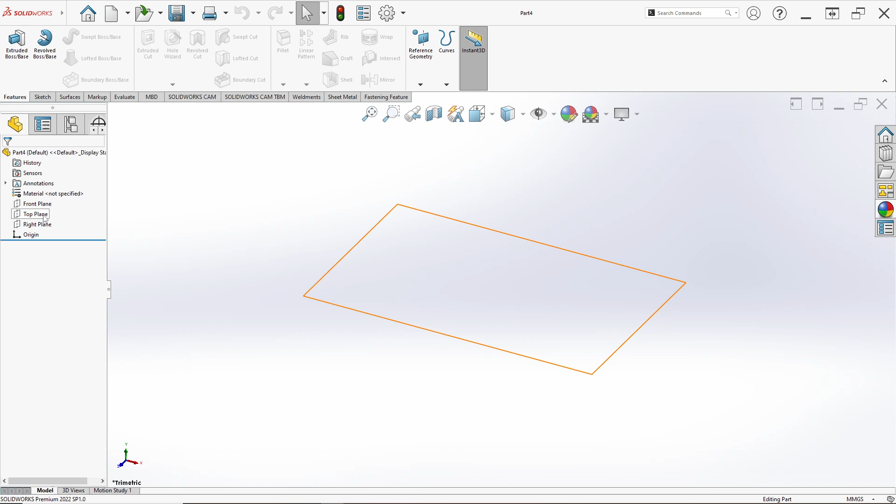At first we start by drawing from the top plane. Right click on the top plane and click sketch. Draw a circle from this point, then set the dimension of the circle. For example, the diameter is 120 millimeters.

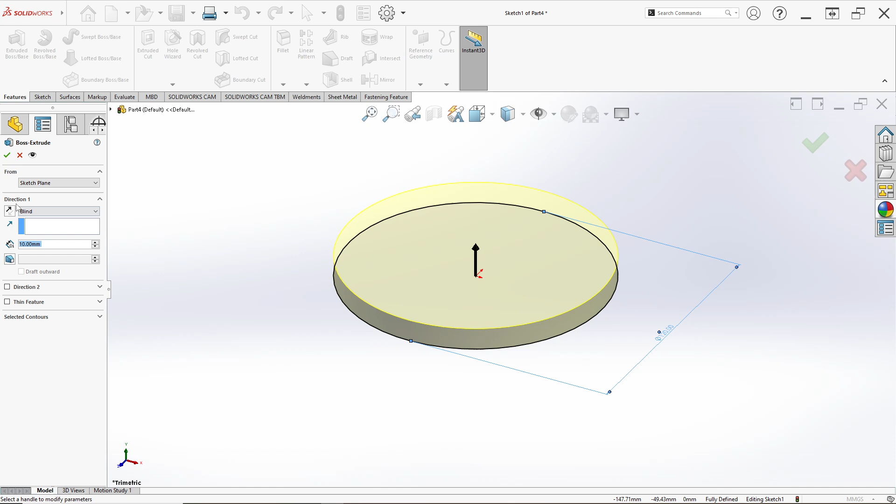After that, export to solid part with feature and click extrude boss. Direction is blind, and for depth, for example I set it to 135 millimeters. Click OK, and now we have a solid cylinder like this. We go to feature and select shell.

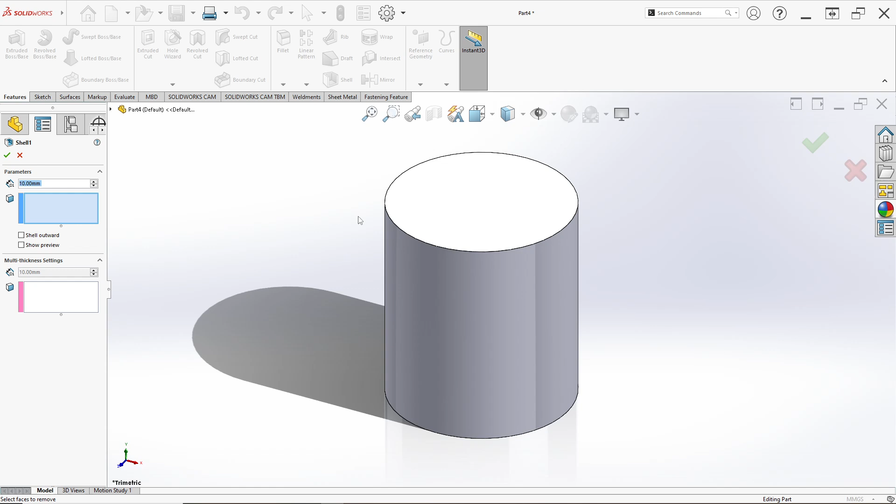We use the shell feature. The shell feature is used to hollow out a solid body by removing material from its interior, leaving a thin wall of uniform thickness. For face, we select the top face in here.

For thickness, I set 1 millimeter, for example, and click show preview. The thickness of 1 millimeter is the thickness of the wall. After that, click OK and done. It's so simple, removing material from the interior and leaving a thin wall of uniform thickness like this.

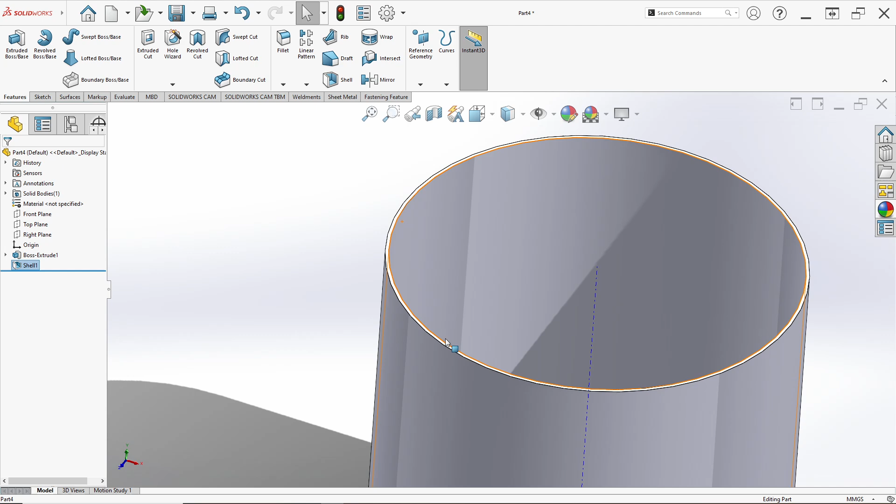Then select the front plane, right click and click sketch. Draw a center line from this point to the top like this. Ensure the center line is set to make vertical.

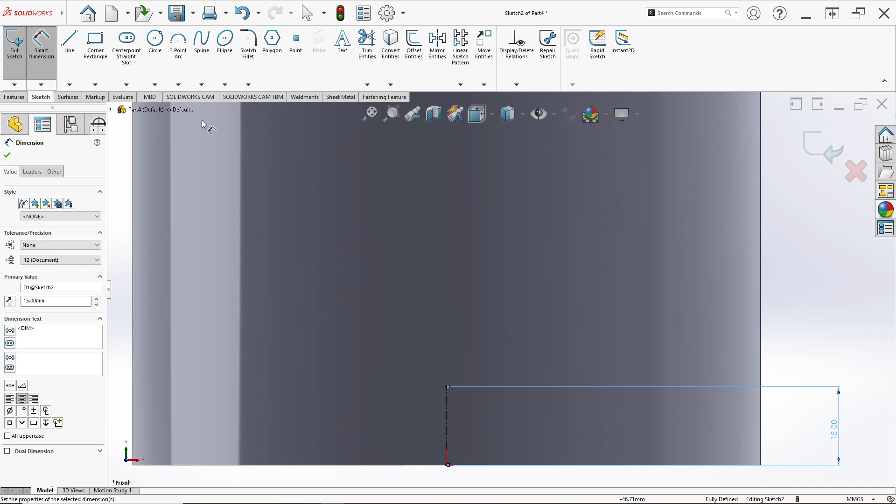Then set the height of the center line, for example 15 millimeters for distance. Then select polygon from the sketch and draw it like this. Set the dimension for the inner circle of the polygon, I set 15 millimeters too.

Click exit sketch. After making the sketch polygon from the front plane, go to feature again and click wrap. We use the wrap feature here.

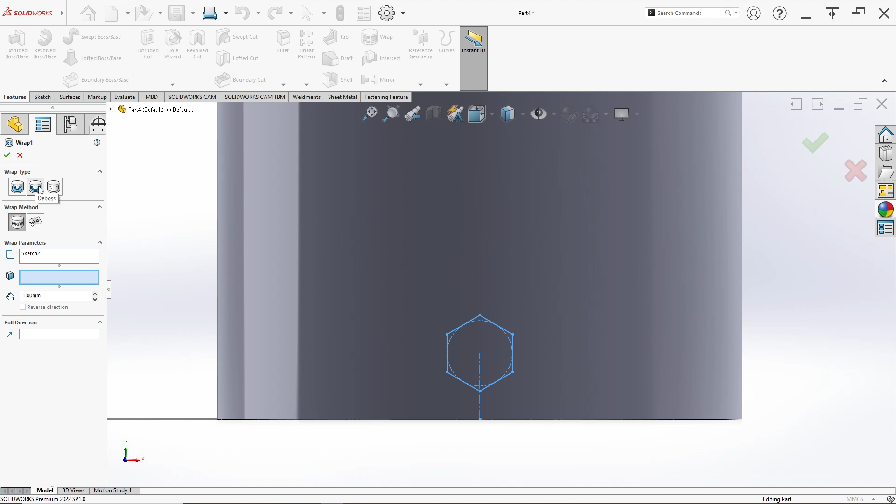The wrap feature is very useful for engraving, embossing, or creating cutouts on a curved surface. For wrap type, I select deboss, because deboss is used to engrave while following the curvature with no distortion. For face, select this face or cylinder face, and click OK and done.

It's so simple. We just engrave while following the curvature, the polygon engraved from the wall of the cylinder like this.

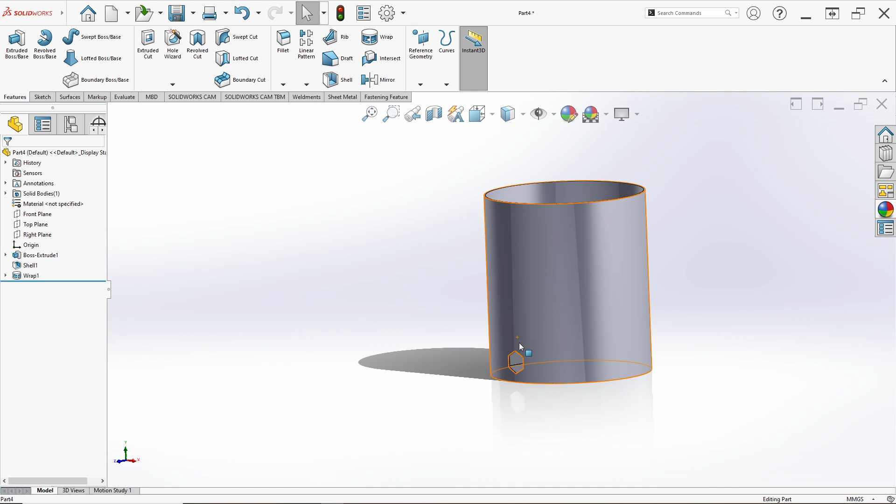Then go to the front plane. After that, go to feature and select circular pattern. For feature and face, select this wrap one. For direction, we can select this face again, the cylinder face.

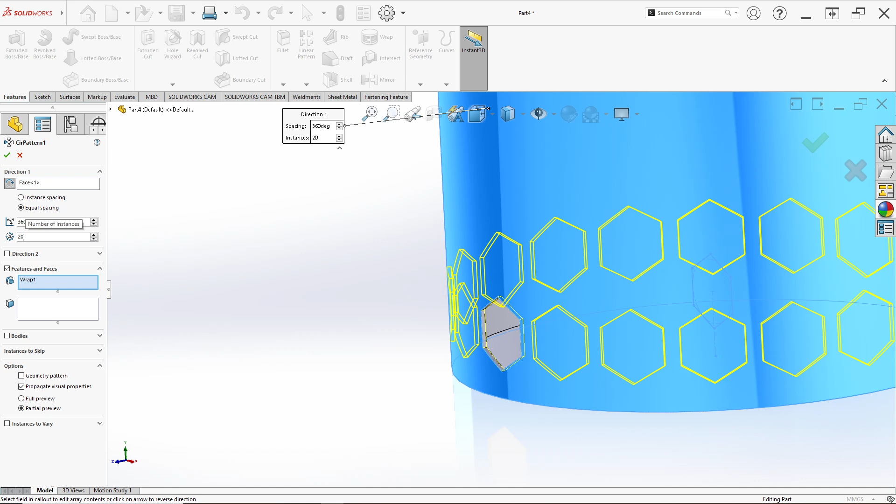Click OK. We can see again in edit feature, for example I set 20 for number of instances. Click OK, like this.

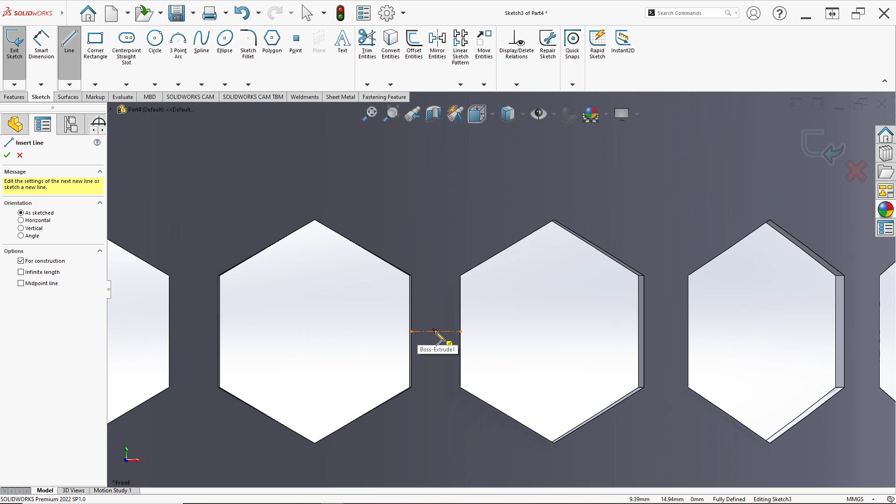Then go to the front plane again, right click and click sketch. Draw a center line from this point to this point, between a cut of the polygon, and draw again the center line to the middle point of two cuts of the polygon like this.

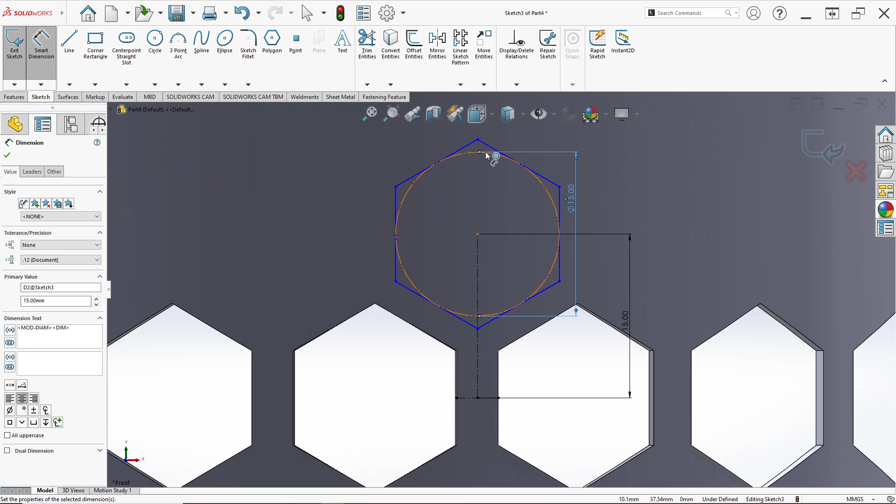Then set the dimension for distance, 15 millimeters again like before, and make a polygon again from this point to below. Set the dimension for the circle, I set 15 millimeter diameter for the inner circle of the polygon like before.

Just exit sketch, go to feature and click wrap again. Click boss for wrap type, and for face, select this face, and here is sketch 3, the polygon like this. Click OK.

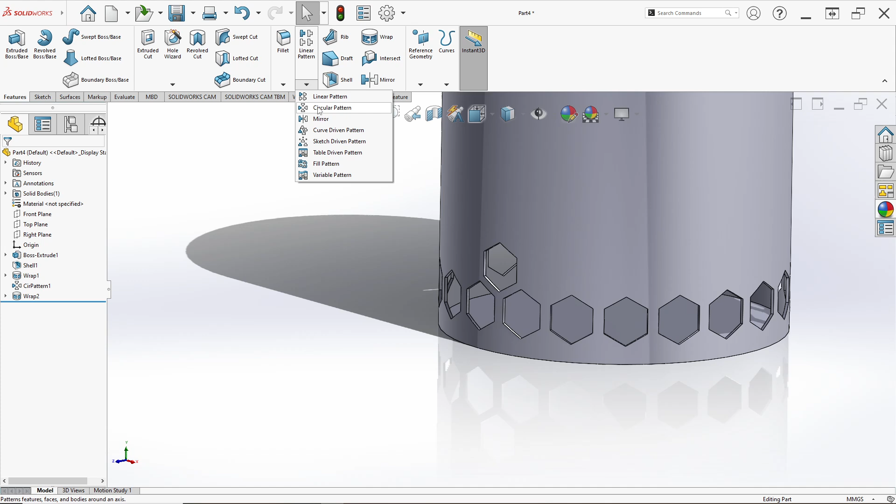Go to feature again and select circular pattern. For feature and face, select this wrap two. For direction, select this face, the cylinder face, and set 20 for number of instances like before. Click OK.

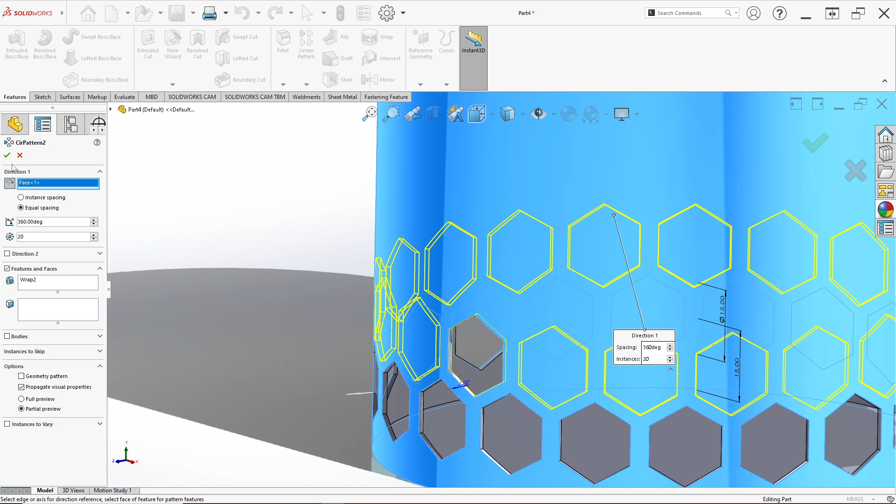And done, it's so simple. After that we want to make it like this, circular pattern to the top, using a feature called linear pattern. Go to feature and click linear pattern like this.

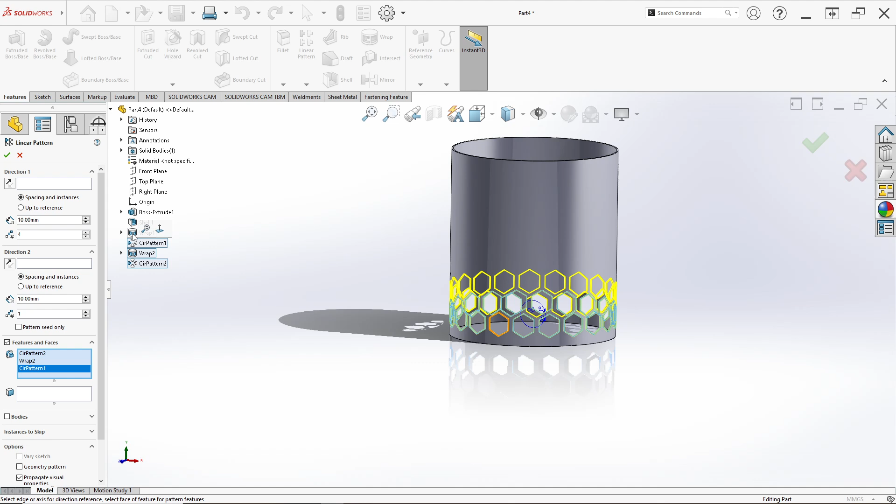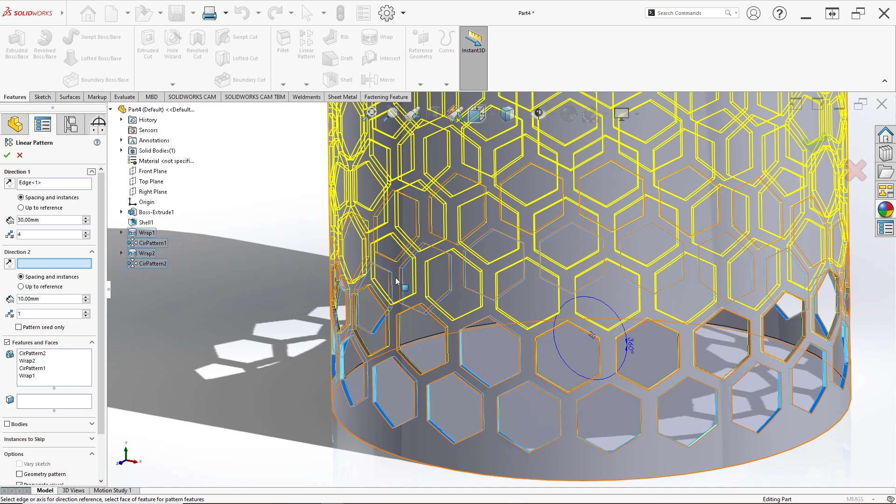For feature and face, select circular pattern 2, wrap 2, circular pattern 1, and wrap 1. For direction, we can choose this edge on the top face. We set the direction or spacing here to 30 millimeters, because before it was 15 and 15, so 15 plus 15 is 30 millimeters.

For example, here the number of instances I set to 4. After that, just click OK. We can wait until the program finishes.

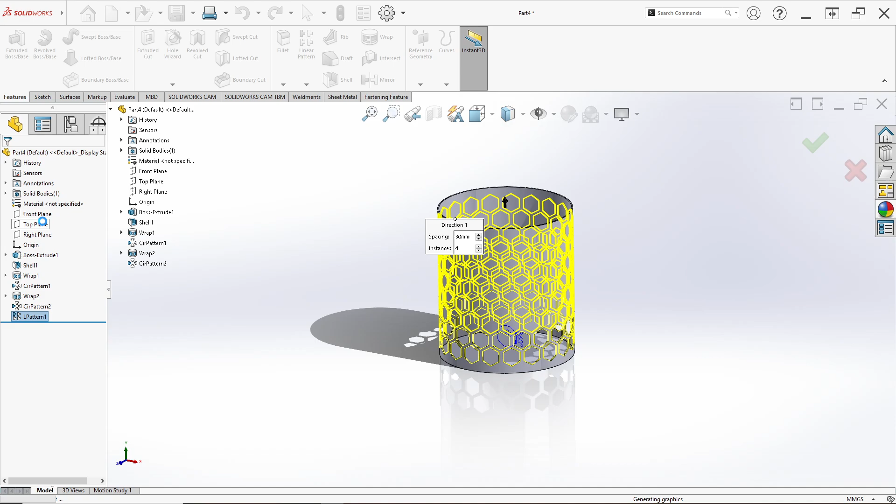For feature and face, select circle pattern 1, wrap 2, circle pattern 2, and wrap 1. Distance here I set to 30 millimeters, and done like this. It's so simple. After that we can go to fillet, select fillet, and set 0.5 millimeters because the wall has a thickness of 1 millimeter.

Set this face and set this bottom edge. Click OK, and done.

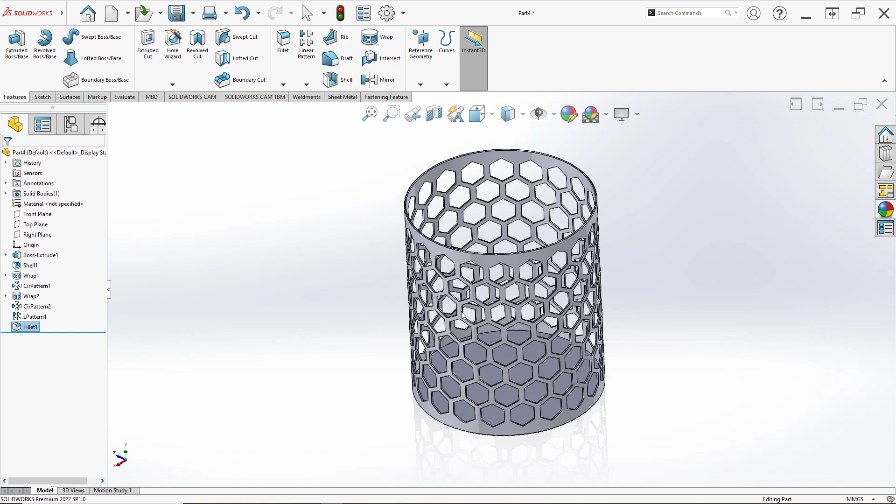We can change appearances. Switch to isometric view, select all the features, choose appearances. For example, I set it to plastic, click medium gloss, and for example I select yellow medium gloss plastic like that.

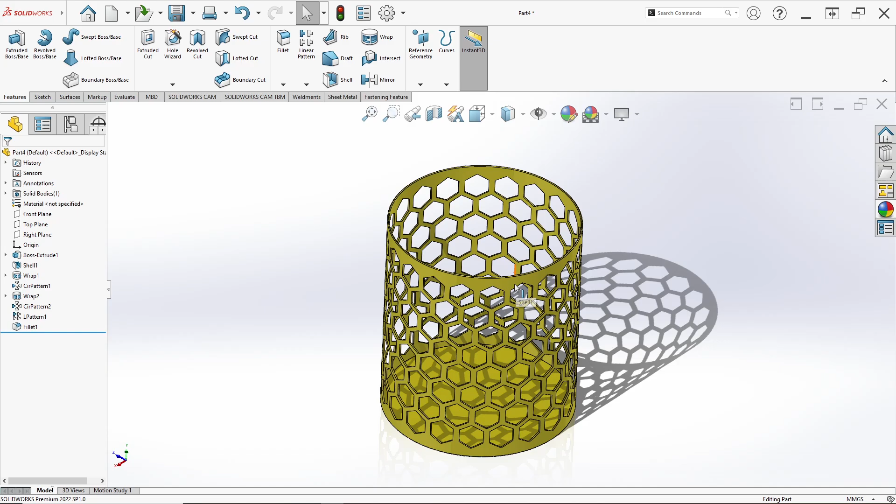And done, it's a simple pen holder in SolidWorks. You can make or design this as a first part for learning SolidWorks. I hope this tutorial helps you learn SolidWorks. It's perfect for beginners.